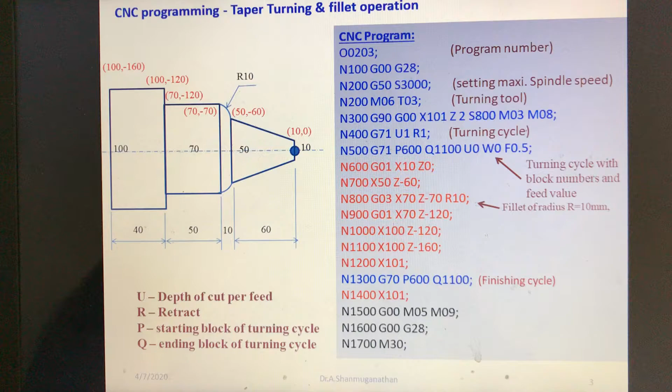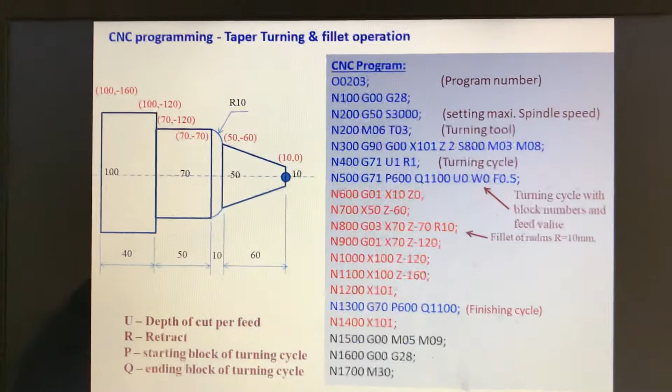Welcome to this session, and in this session we are going to see about the taper turning operation and contouring like fillet operations. See, this operation is similar to the step turning operations which we have explained in my previous session.

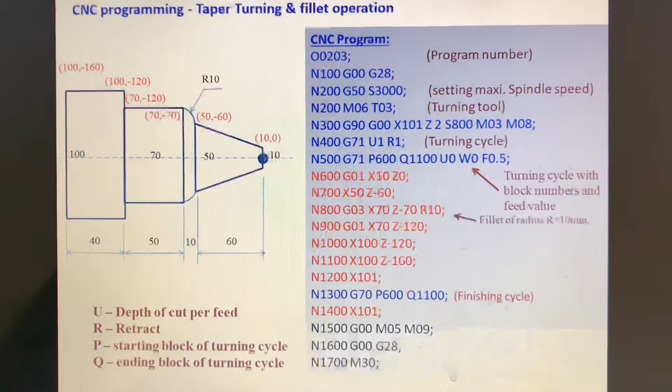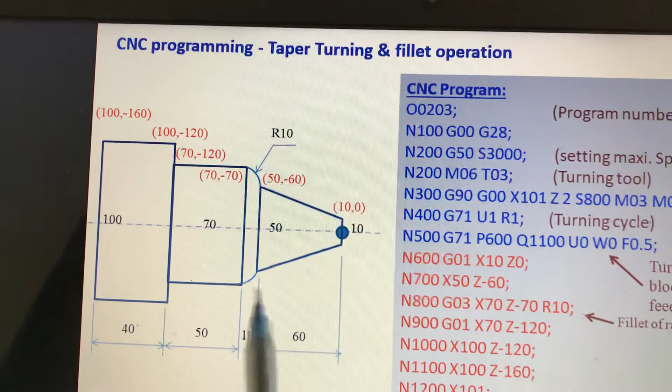Let me show you how the workpiece looks like. So this is the workpiece, and let me tell the coordinate points in this workpiece. You see, this is having a diameter of 10, diameter of 50, diameter of 70, diameter of 100, and there is a taper for a length of 60, and there is a fillet for a length of 10, and there is a step turning for a length of 50, and again plain turning for a length of 40. So we have to find out the coordinate values at all these points.

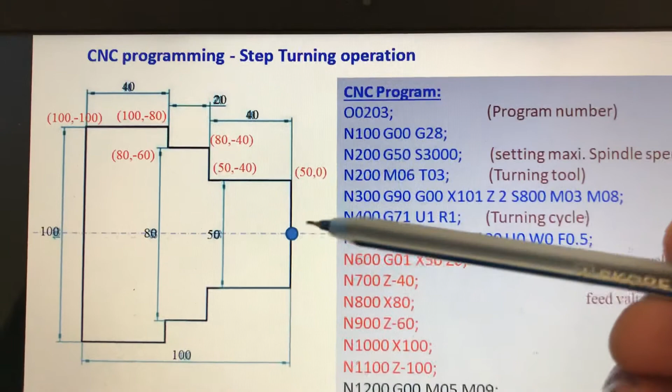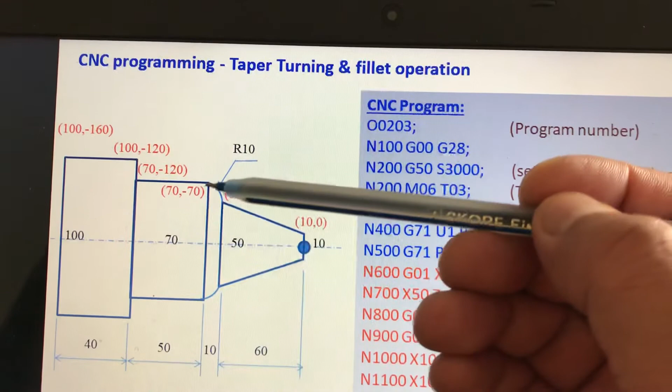As I explained before, we have to take the value of diameter for the value of x at all these points, and so do here also. And we will be taking 10, 0 at this place. X is 10, z is 0, and here x is 50, z is minus 60 because it is 60 here in negative z direction. And at this place x is 70, z is minus 70.

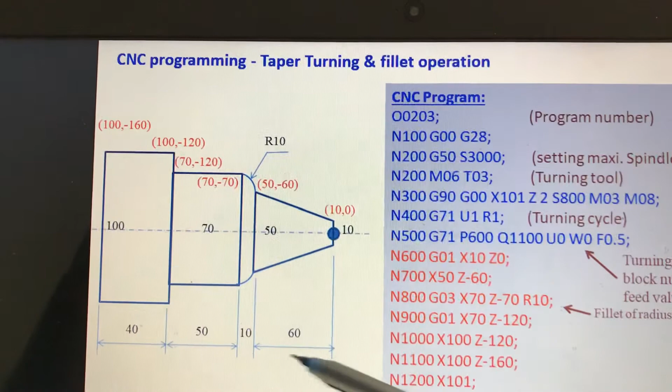At this place x is again 70, z is minus 120. At this place x is 100, z is minus 120. And at this place x is again 100, but z is minus 160. So we have found the coordinate values. Now we have to see how the tool is moving.

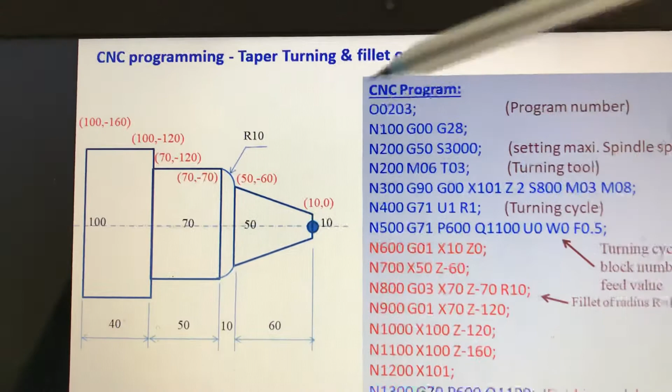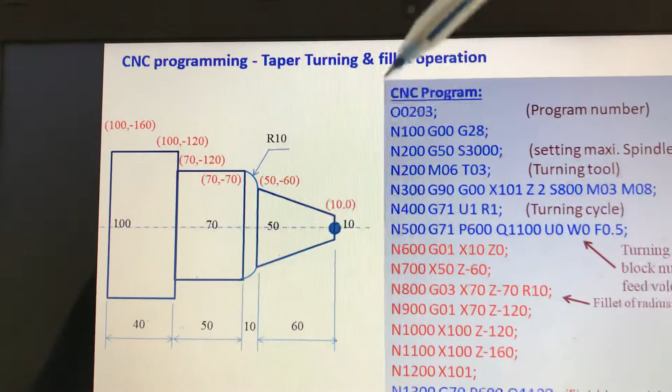Tool is coming from somewhere here from the machine 0 point, and it comes near the workpiece surface. Okay, before machining the block diameter is 100, so better to keep the tool a little away from 100. We can take x 101, means 1 mm away from the outer contour of the workpiece. So from machine 0 we will move till here, but it should not touch the face of the workpiece also, so we will keep z some positive value, like z1 or 2.

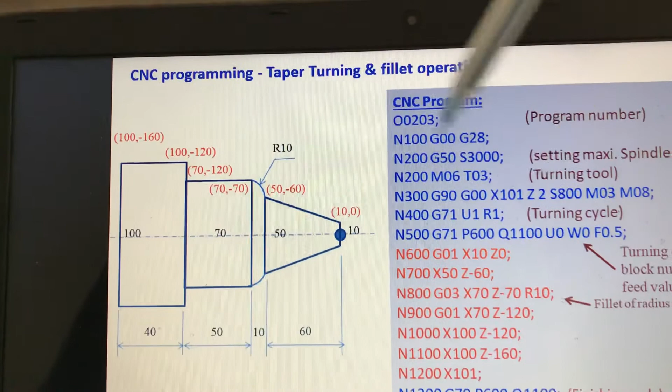So initially for safety, from machine 0 point G28 we bring it to x 101 and z plus 2. I have given you here x 101, z plus 2. After that, from here we move to point number 1, then point number 2, point number 3, point number 4, point number 5, point number 6. This is the tool path.

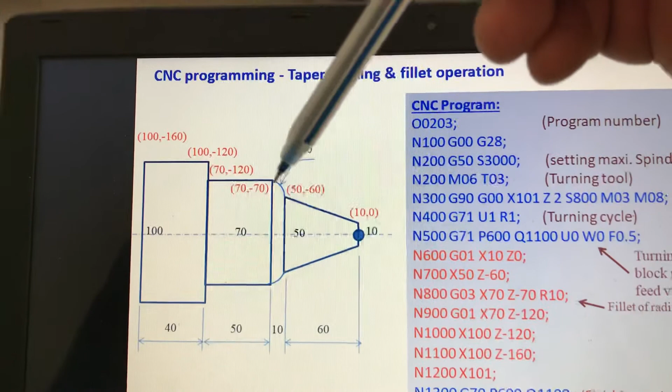Okay, from point number 1 to 2 is a linear cut, so G01, but 2 to 3 is circular interpolation. It may be G02 or G03, but in this case it is in counterclockwise direction, so here we will be using G03, then again G01, G01, G01. So the tool path we can define using the coordinate values.

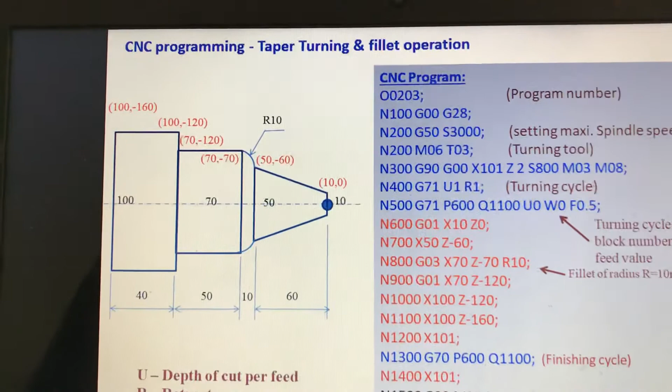And since this is a turning operation, here also we have to tell this is a turning cycle, so we will be using the command called G71. G71 means it is a turning cycle. When you use G71, it should follow with the depth of cut U value. U is 1. You can give 2 or 3 also, but here let us take it as 1. Small depth of cut is always good.

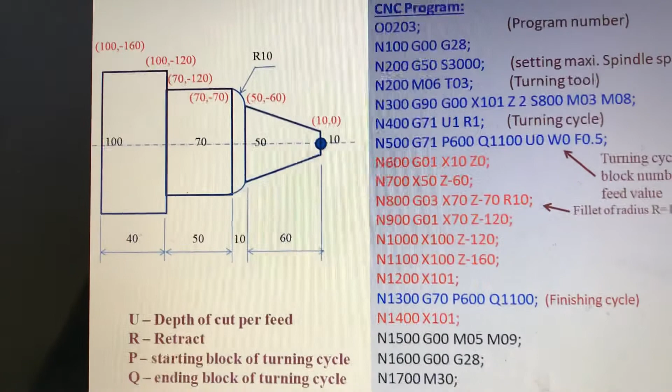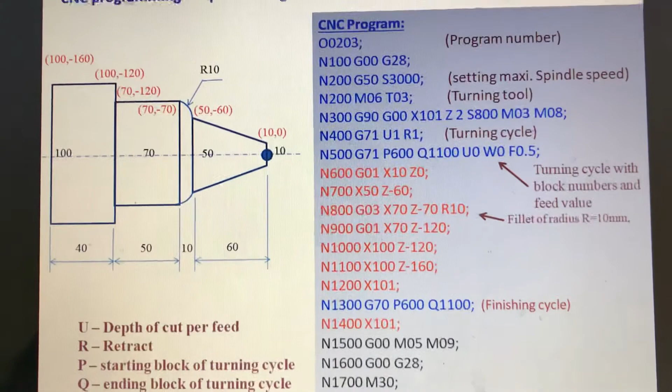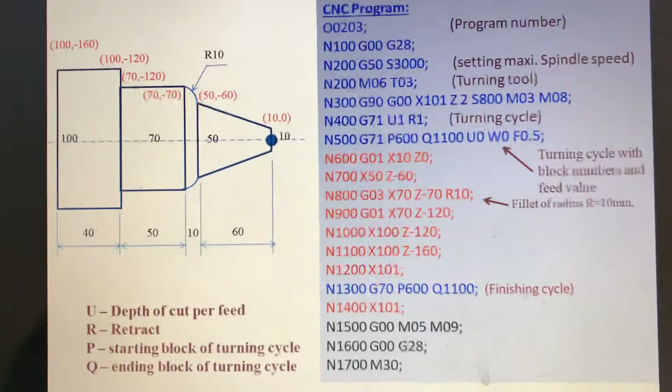And R value, R means retract value. After the depth of cut, come out, go back to initial position, again depth of cut, cut the material, come out. This coming out, relieving from the workpiece surface, is called the retract value. That value we keep as R1. You can keep R2 or R3 also, but in this program we will take it as R1 and U1. So this is about defining the turning cycle G71.

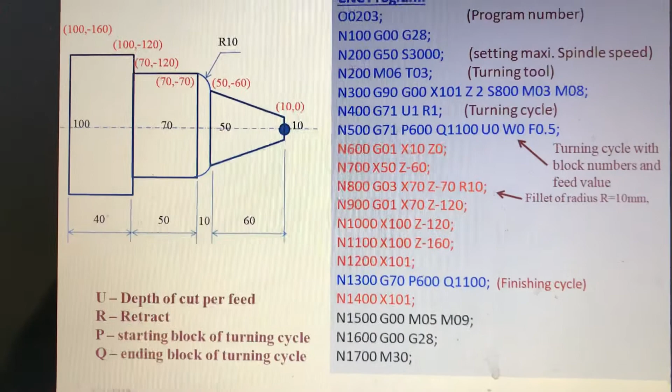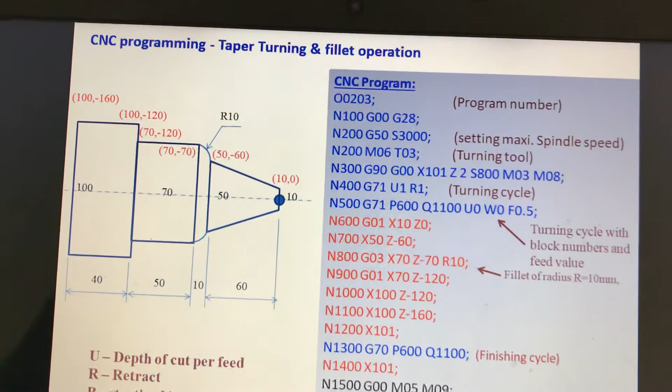After defining the cycle, you should tell from which block number to which block number the turning cycle continues. The from block number is shown by P value, that is G71 P some value, and the to block number is shown by Q value, that is Q some value.

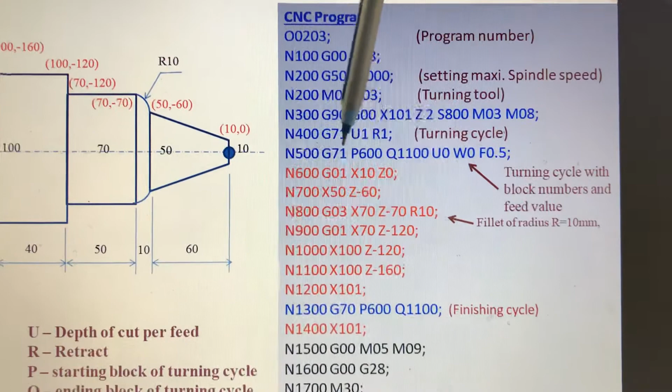That is shown here. You see, after giving the turning cycle G71 U1 R1, we are going to give G71 P600 Q1100. That means from block 600 the turning cycle starts, and till block number 1100 the turning cycle continues.

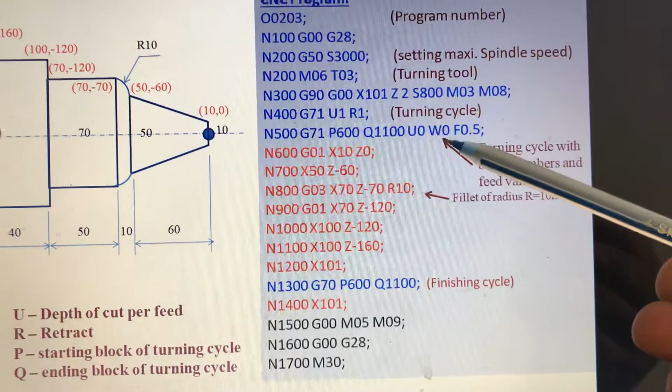Okay, and U is 0, W is 0. This is representing the axis in X direction, this is the axis in Z direction. So we take it as 0 reference axis in X and Z direction, sorry, and feed value is 0.5. So this we are going to define, and this is how we are going to do the program. Now let us see the program block by block.

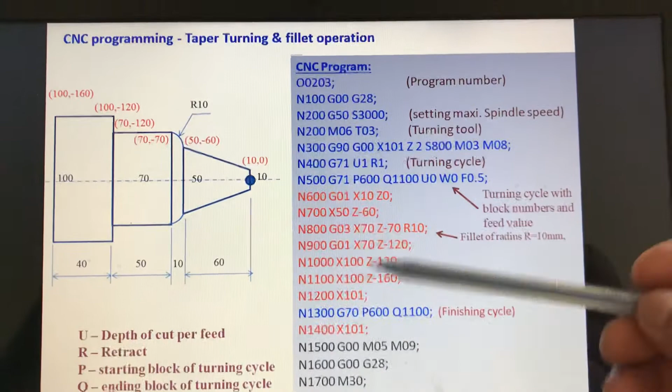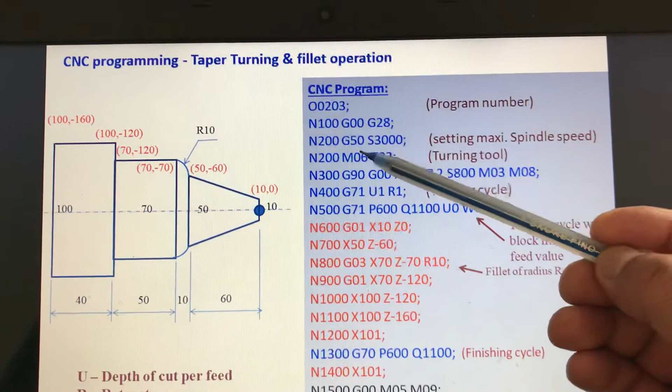You see, the first one is the program number 203, and next is the block number, first block, that is N100, go to home position, and then fixing the maximum spindle speed G50, S3000, and then change the tool M06, T03, T03 is the turning tool, and then absolute programming G00, it is not cutting, rapid travel, go to the point X101, Z2.

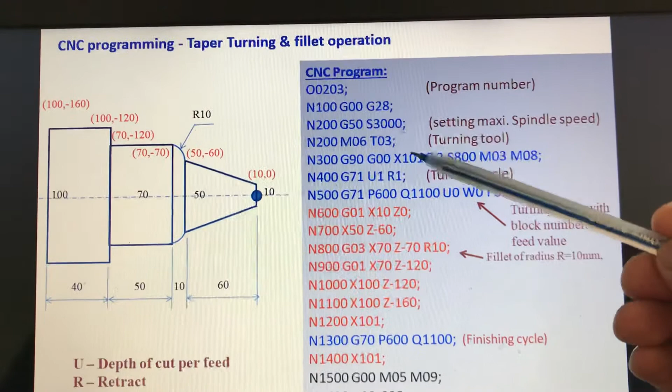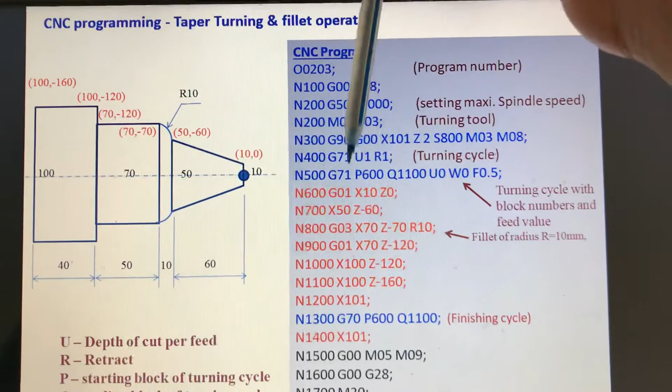From where? From the machine zero point, go to the point X101, Z2. Means if machine zero is somewhere here, from here it moves to X101, Z2. And then from here we will tell this is a turning cycle. So G71, U1, R1, turning cycle. Then we tell the block number for beginning of turning cycle and end of turning cycle. So again G71, P600 till Q1100, and U0, W0, F this much.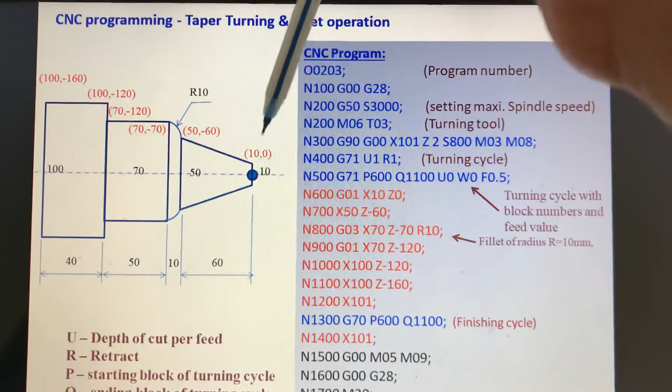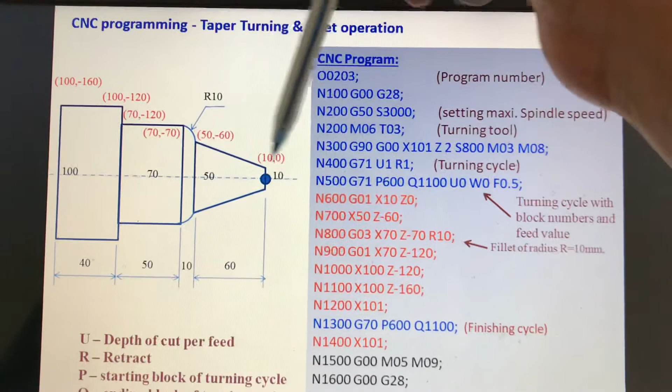After this we will keep defining point number 1, point 2, point 3, etc. So from here we are moving to the first point. The first point is 10, 0. Z0 means it is touching the workpiece. Since it is touching the workpiece, we should give G01. So G01, X10, Z0. Then from here to here also G01: X50, Z minus 60. G01 I didn't write because it is understood; it is in the memory of the machine. So X50, Z minus 60.

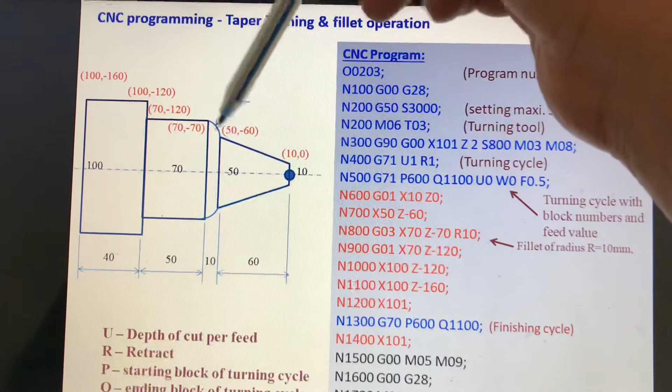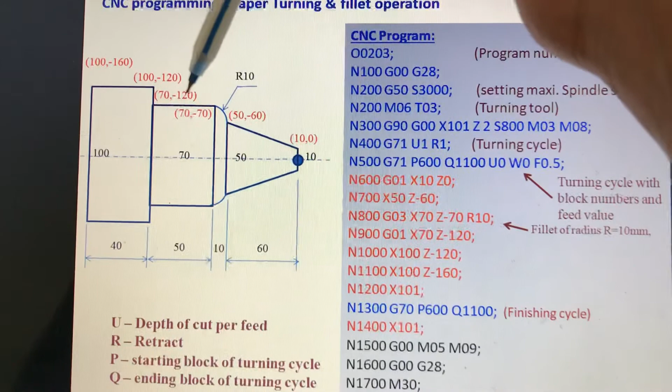From here to this point, it is a circular interpolation in counterclockwise direction, so we should use G03. G03, X70, Z minus 70, R10. After that again G01, X70, Z minus 120. Then again G01, X100, Z minus 120. Then X100, Z minus 160.

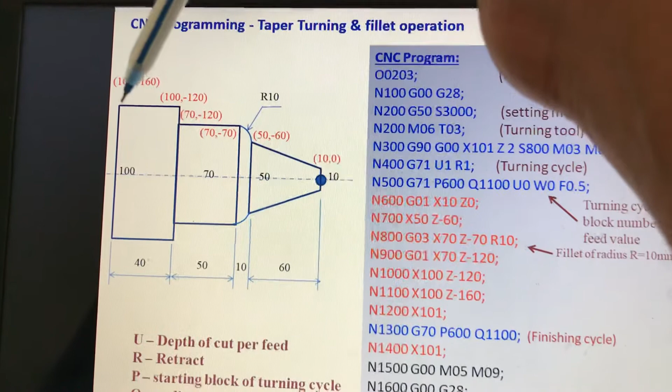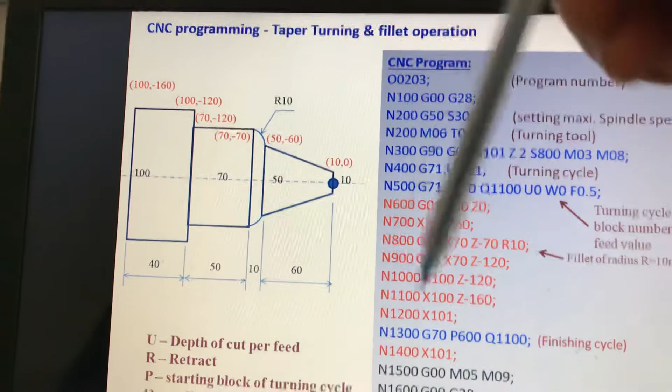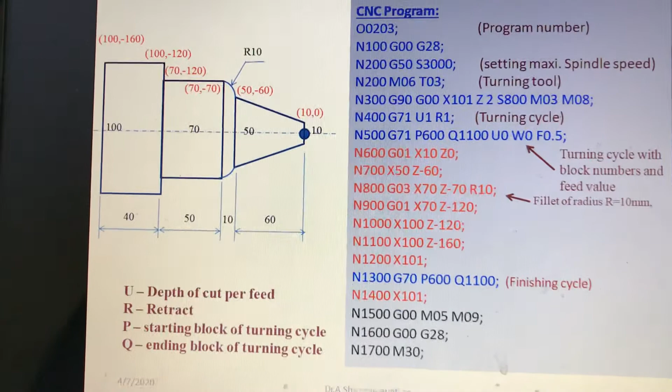So the turning cycle is finished. Then we have to relieve it outside, so X101, and it comes out here. And in this problem I have introduced one more cycle called the finishing cycle. This is also a turning cycle. If you use G71, it is called rough turning cycle; material is removed more. If you use G70, it is called finishing turning cycle; material is removed very little, for minute operations to make a good surface finish.

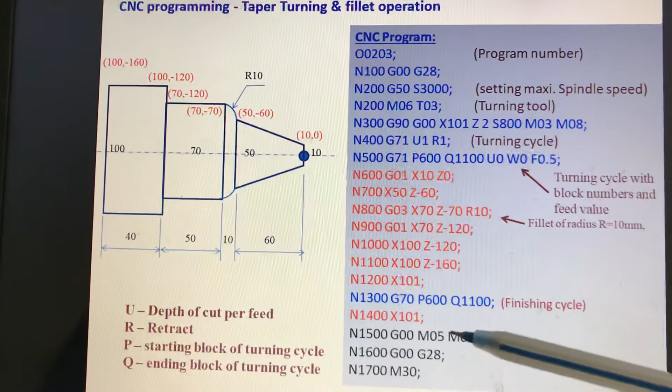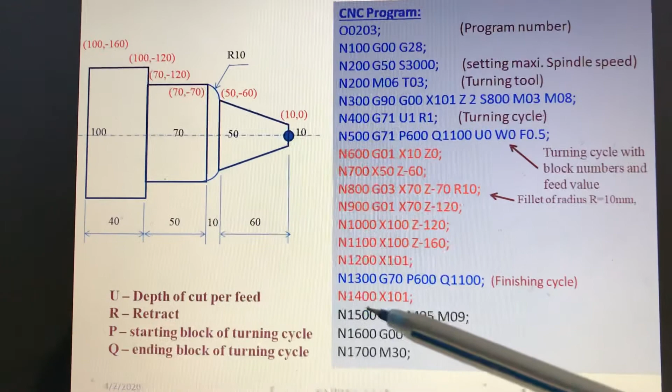So again I am repeating this. After the rough turning operation, I give G70 with the same block numbers, starting from block number 600 and ending in block number 1100. So G70, P600, Q1100. This is the finishing cycle. After this is done, go to X101. After that, stop the spindle, stop the coolant, go to home point and end program. So this is all about this program.

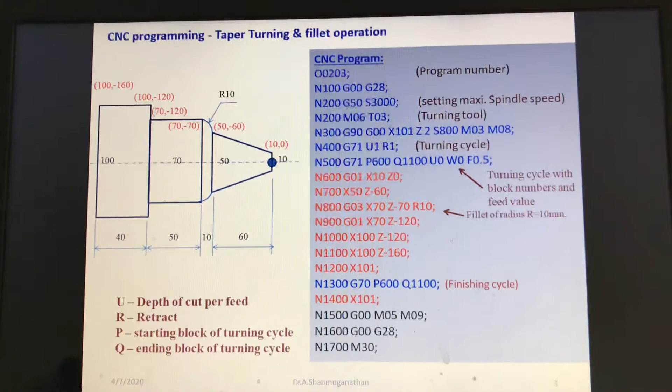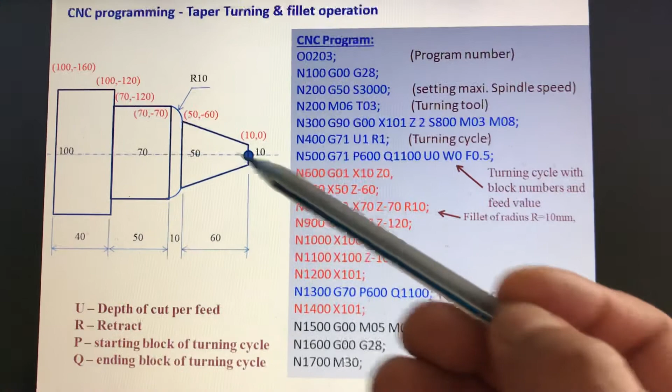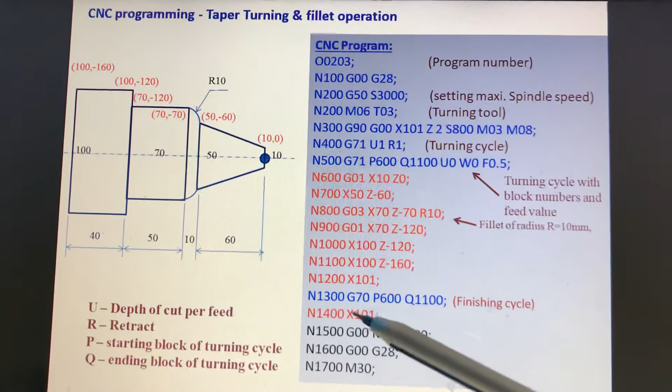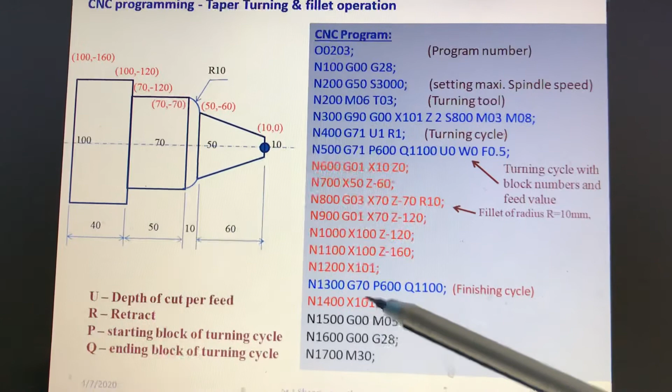This is similar to the step turning operation. The only change is introducing the linear cut; even though it is a taper, we use G01 only. One extra difference is that here we have used the radial cut G03 in between. And we can also use a finishing cycle after the rough turning cycle with the command G70 with the same starting and ending block numbers, P600, Q1100, and then bring the cutting tool a little away from the work surface, that is X101. Then stop the spindle, stop the coolant, go to home point, and finally end the program.

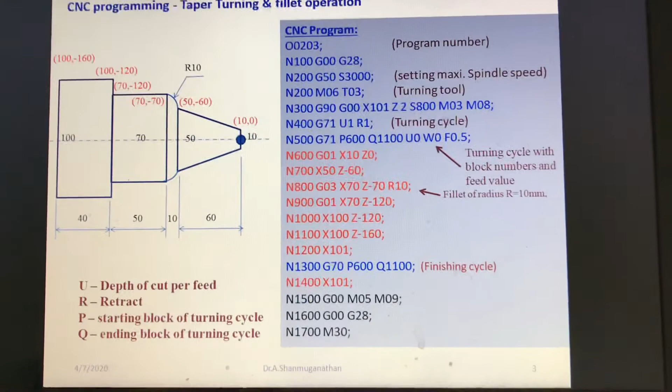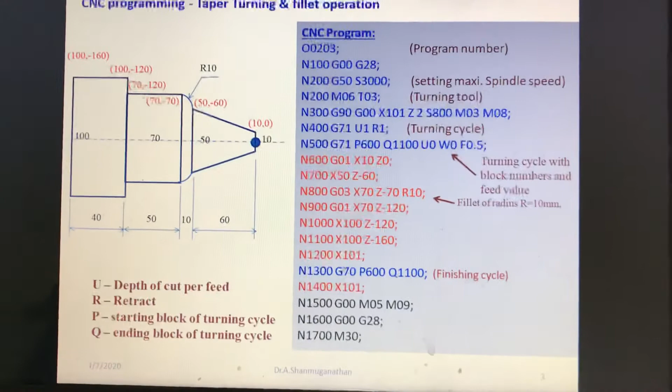So this is how we do taper turning and fillet operations in a turning machine. In the next session, we will see how to do drilling operations in lathe machines. This is a simple drilling, and I am combining the drilling with step turning operations. This we will see in the next sessions.